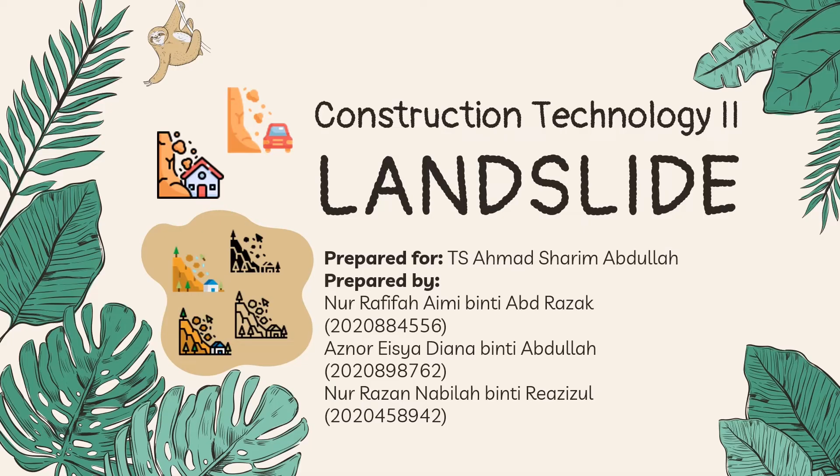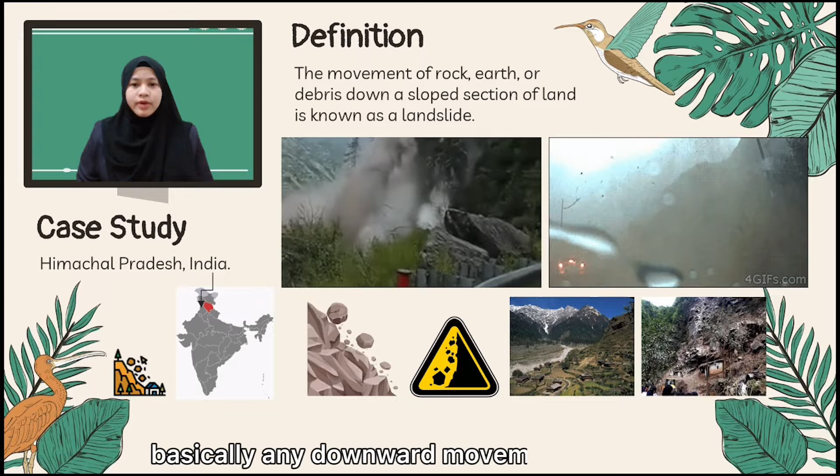So today's video will explain about landslides. A landslide can be defined as movement of debris such as rock or earth down a sloped section of land. It is a type of mass wasting. Mass wasting is basically any downward movement of Earth's surface that is worn away.

To elaborate further, a case study in Himachal Pradesh, India is chosen. As you can see, landslide incidents in Himachal Pradesh are very common. The two main factors in this case study are heavy rainfall and anthropogenic intervention, which directly correlate. Anthropogenic intervention for the purpose of development cuts hillocks.

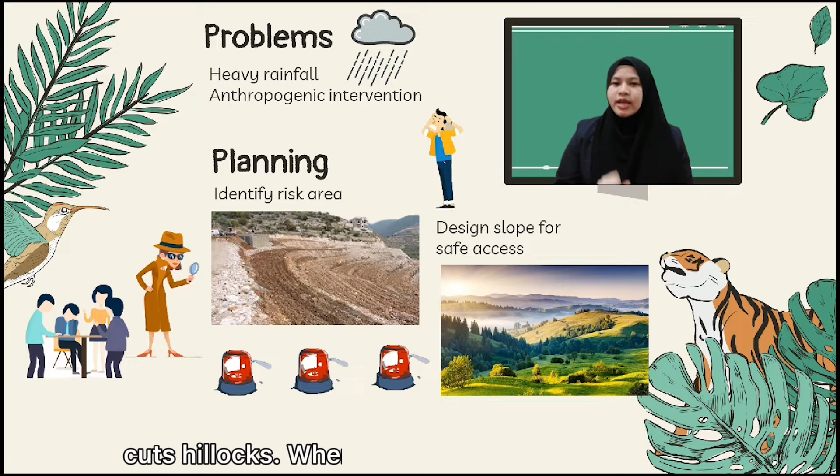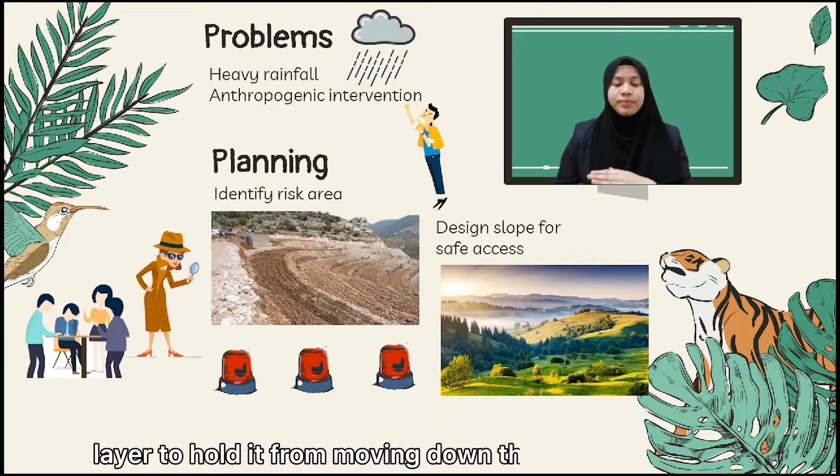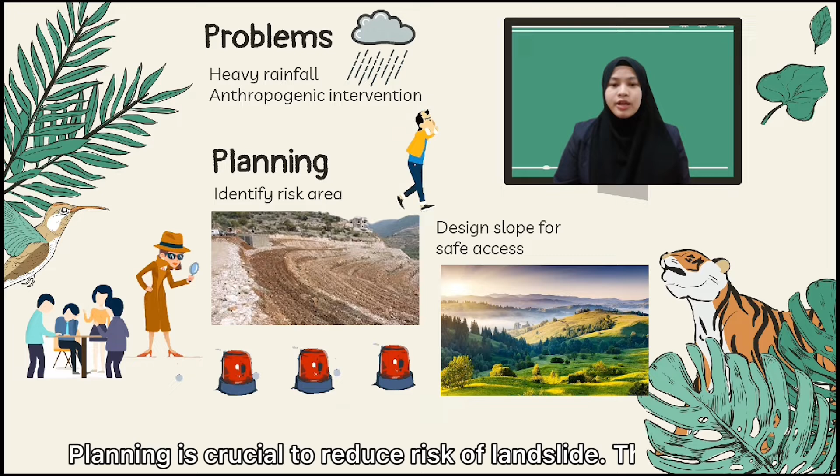When the natural landscape, such as trees and rocks, is removed, the soil does not have any protection layer to hold it from moving down the slope, especially during heavy rainfall, which then causes the landslide. Planning is crucial to reduce the risk of landslide. The first step for prevention is to identify areas where landslides could occur.

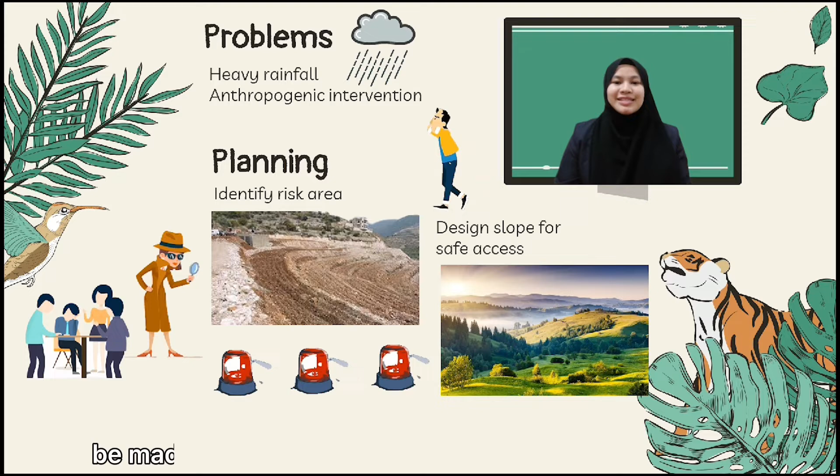When the area has been identified, a safe design can be made as a retainer to provide safe access, especially for vehicular movement. Hi, I am Eisya and I will be covering the construction process, equipment and benefits.

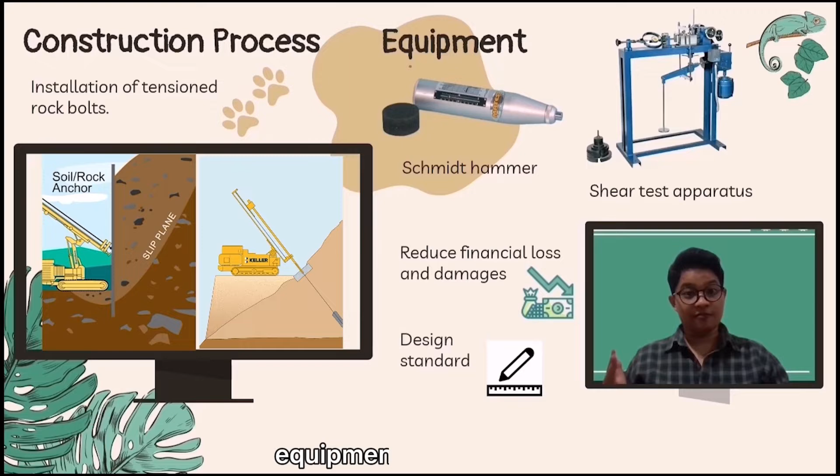So in Himachal Pradesh, to prevent another incident of landslide from happening, tensioned rock bolts were installed. The slope of the bolts was designed to be equal to the difference between the angle of friction and the dip for maximum efficiency. The angle was maintained so that the bolts could be installed easily and the length of the bolts could be kept to a minimum.

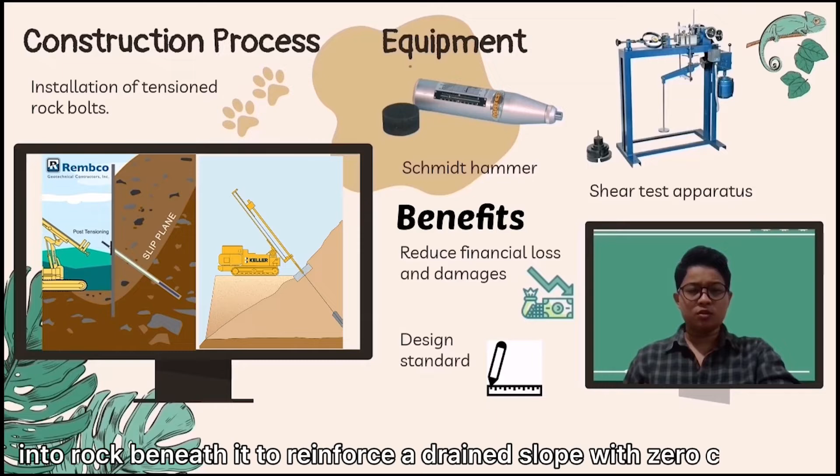Rock bolts are installed at right angles to the sliding plane into the rock beneath it to reinforce a drained slope with zero cohesion. In order to install the tensioned rock bolts, a Schmidt hammer and shear test apparatus are used, respectively, to determine compressive strength and to perform a direct shear test.

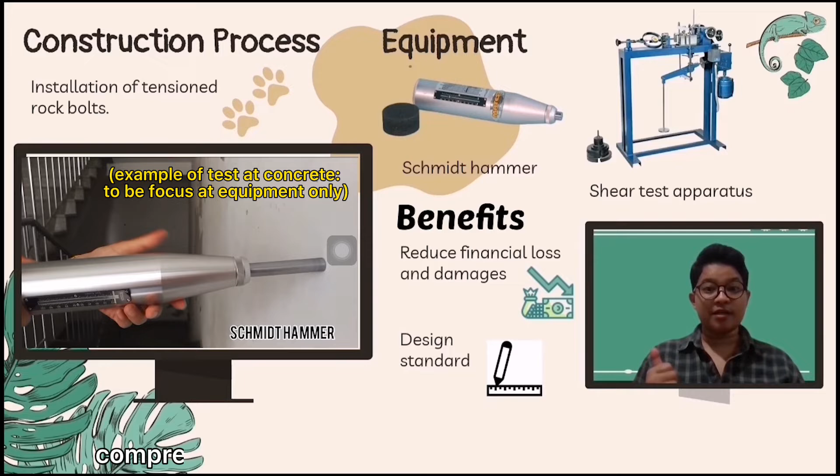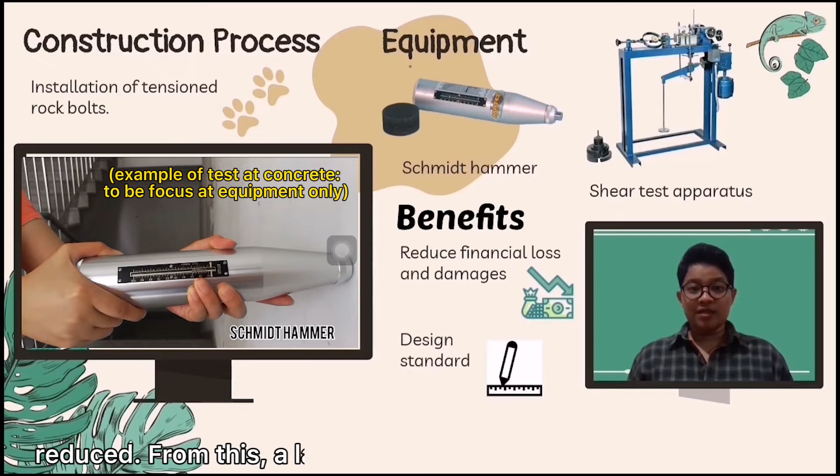The most obvious benefit that can be seen from the tension rock bolt installation is that financial loss and damage due to landslides is reduced. From this, a landslide design standard can be produced which will aid design selection that is cost-effective for planning landslide hazard mitigation strategies.

The safety and health aspect includes preparedness guidelines that provide a standard of do's and don'ts for when an incident of landslide takes place. It is crucial to take into account rescue operations, even though human exposure to disaster risk has remained low in Himachal Pradesh due to low population density.

Lastly, damage control, where the authorities issue instructions to repair the damaged road in the subsequent 3 to 4 days after the incidents. Guidelines used in Himachal Pradesh include the Indian Standard Landslide Control Guidelines and the National Landslide Risk Management Strategy.

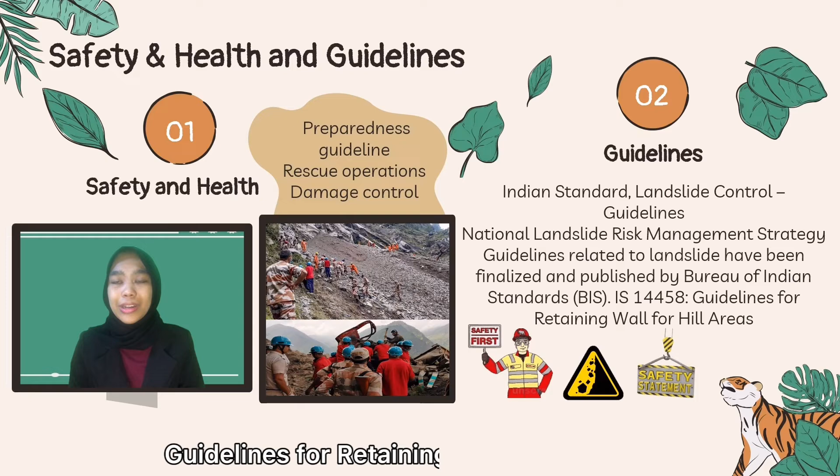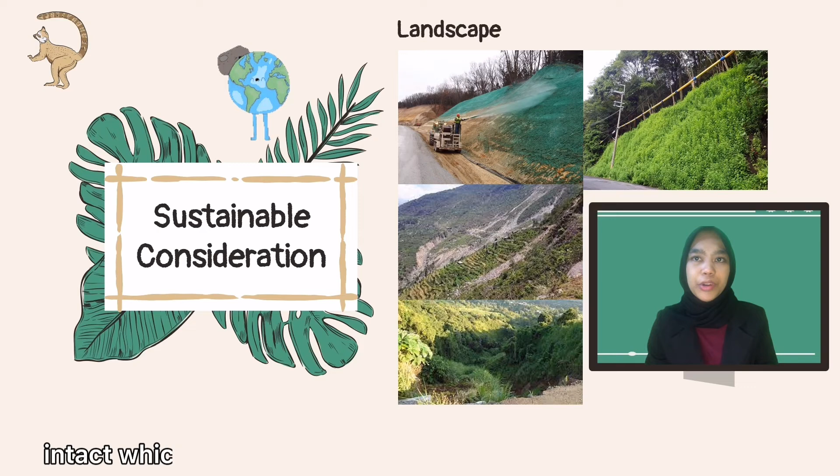Guidelines related to landslides have been finalized and published by the Bureau of Indian Standards, BIS IS 14458, guidelines for retaining walls for hill areas. Sustainable considerations may include landscape. Softscape is a natural retaining element where the roots of plants hold the soil intact, which prevents landslides. Most slope area construction nowadays will plant grass patches to minimize downward movement of soil during construction.

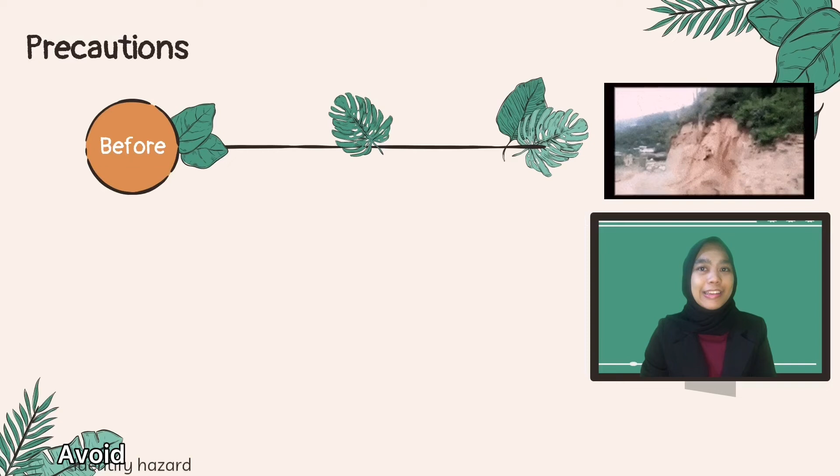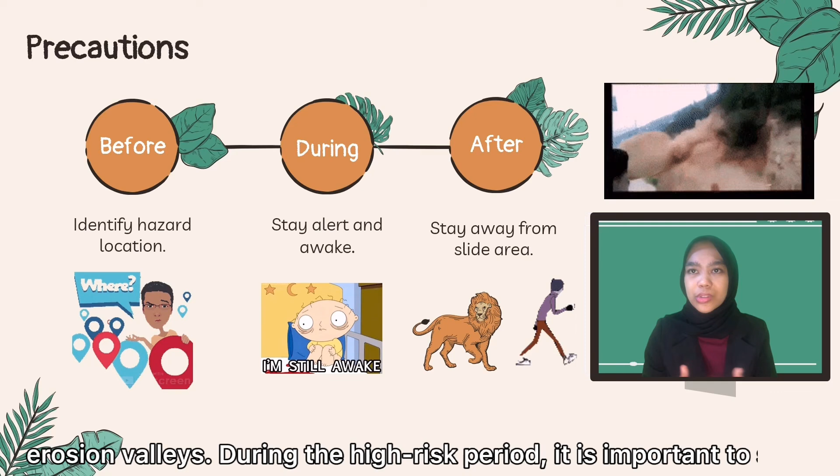Avoid building near hazardous locations such as steep slopes, close to mountain edges, or near drainage paths or natural erosion valleys. During the high-risk period, it is important to stay alert, as many debris flow fatalities occur when people are sleeping. Lastly, stay away from the slide area, as there may be danger of additional slides.